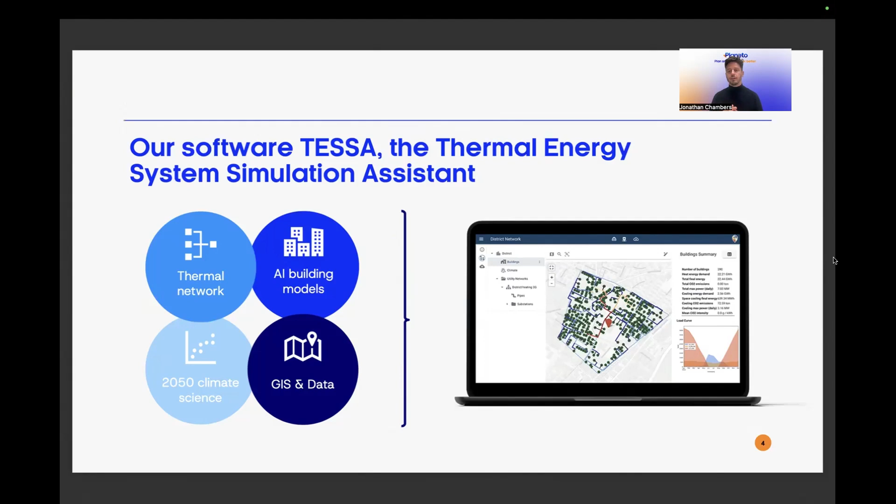All of this powered by large geospatial and building data sets, climate data sets, everything needed for powering all of these algorithms. These are the four things that we integrated into our online software platform so that engineers at energy utilities and engineering consultants can deliver these projects faster, better, with higher proportions of renewable energy to decarbonize the built environment and to enhance energy security.

We deliver this in our TESSA platform with three main topics, the first of which is allowing flexible scenario analysis. So that means being able to do many scenarios, make them very quickly, make them very easily, adapt them with, for example, different energy sources, different base assumptions to really support better decision making.

We can then really help respond to the customer needs, so really the end users and municipalities, which are the ultimate client of utilities and consultants, by, for example, adapting to local conditions, integrating local renewable energy sources or local excess heat or waste heat from industry. And for our clients, our consultants and so on, to be able to help you win those tenders, help you win those projects, make sure they're actually successful and that they carry through from the first feasibility stages really all the way through design and implementation.

And of course, in this process, we maximize productivity. We turn what can take weeks and months of data collection and design and compress that into a few hours and just a few clicks. We can automate complicated and fiddly topics like dimensioning pipe sizes and optimizing their layout. And we allow you to use the same tools from really the blank slate of the pre-feasibility stage all the way through design engineering phases, with a single tool that carries all of the data and allows all of the detailed work that needs to be done. And finally, we have some really nice collaboration tools built in because we know these are complex, multi-stakeholder projects.

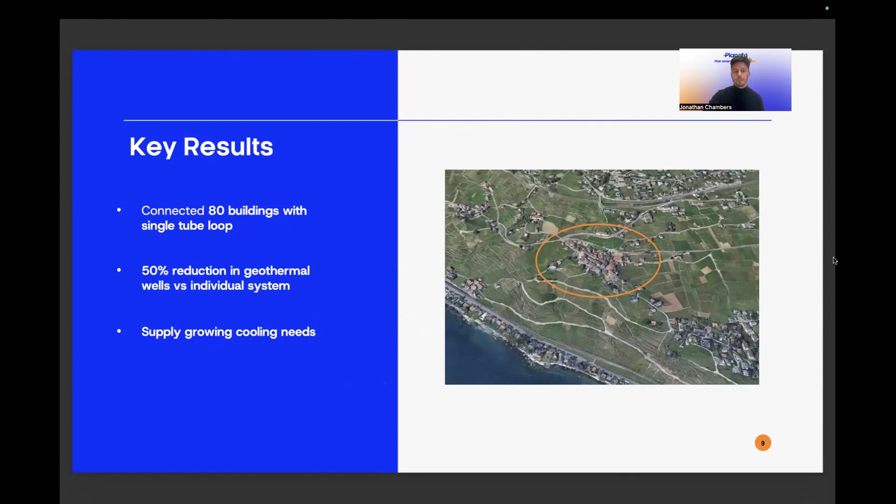The second case study I want to present was in Haute-Sorne. So this was more of a high-level strategic energy concept. Haute-Sorne is quite a mixed municipality with some urban and rural areas that were looking to reduce their CO2 emissions. Actually, they were seeking an energy label, the Energy Cities Green Energy Label. This is where we delivered TESSA in collaboration with our friends at GeoImpact to deliver investment costs and energy cost projections for an energy transformation for the communities that would use district heating as designed by our TESSA platform.

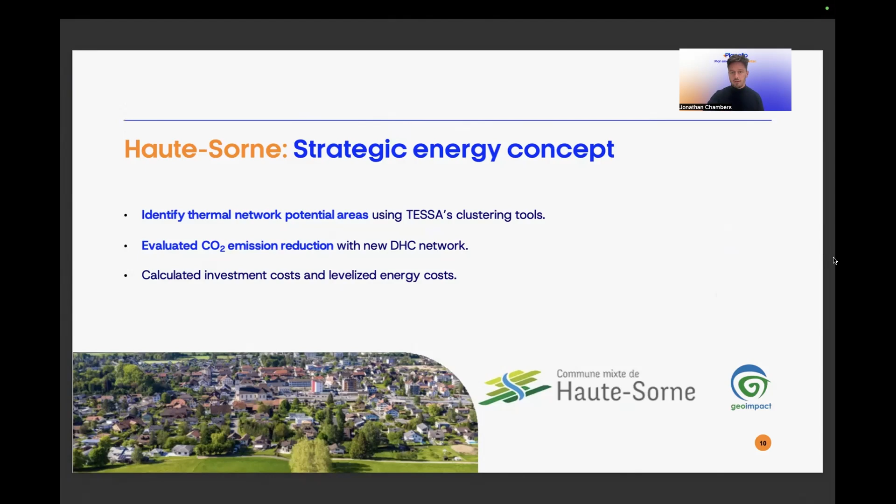So the key results of this: using TESSA, they were able to identify just 5 building clusters that represented 80% of the emissions across the whole municipality. And with just 184 buildings identified, they could design a ground source heat distribution system with a wood pellet peaker plant. So that really used very nicely the local resources they had, which was space for some geothermal base load and quite a lot of managed forested area, which could provide green wood, so renewable energy sources.

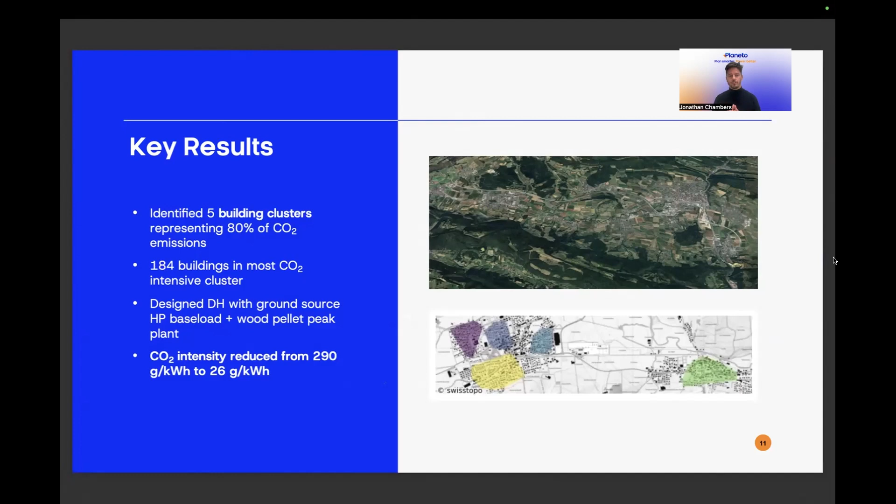And this resulted in them being able to demonstrate a reduction of 10 times the CO2, so going from 290 to 26 grams CO2 per kilowatt hour, thanks to these designs, and do so very quickly and very accessibly.

The last case study I wanted to mention was something where we worked with our very good friends at Sympheny for the energy utility of Schaffhausen. Sympheny do multi-energy optimizations, so that means across electricity, heat, and other energy vectors, and are able to optimize for an area what could be the best resources. And in synergy with TESSA, we were able to demonstrate an automated optimization pipeline for the decarbonization of the urban energy supply and its distribution.

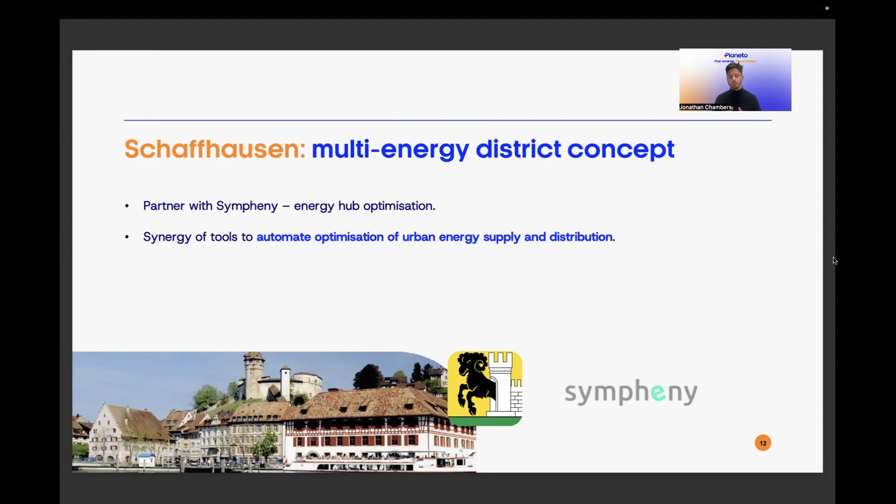So the key result was really automating this whole pipeline, so optimizing which kind of energy resources should be used, and then, thanks to TESSA, optimizing the creation of the thermal distribution network and the simulation of this network, which is of course relatively complicated, having multiple heat sources: solar thermal, wood, various heat pump sources. So that's a multi-source meshed network that we were able to simulate in TESSA and have a fully automated optimization pipeline, with a pilot in one of these areas with about 5 kilometers of pipeline.

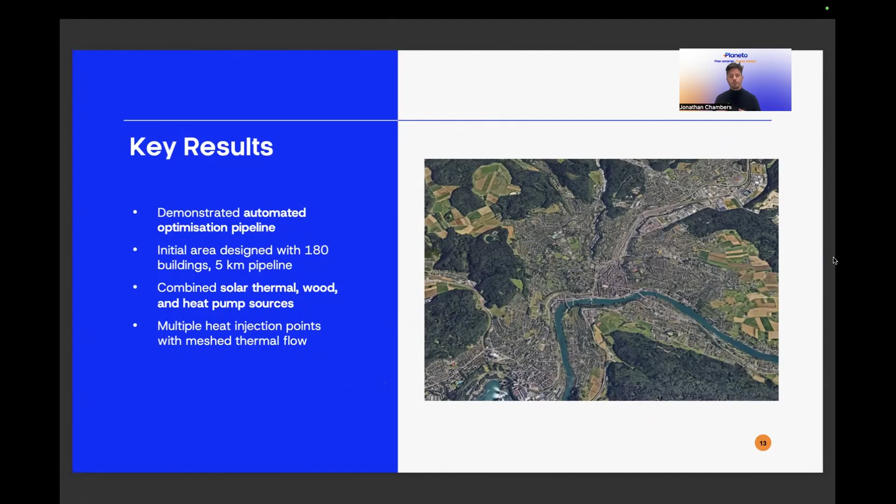What are some of the key features of TESSA that make this possible? Well, we see a few things that are most interesting in the end for our current users and for our current clients. The scale and the speed that we're able to deliver.

So automating a lot of this energy demand modeling, automating with generative AI the design of the distribution network, providing data which is plug and play data for the whole of Switzerland today. We have on our roadmap for the second half of 25 being able to deliver the same kind of data for the rest of Europe.

And of course, being able to have collaborative editing, import of any kinds of data source, export of all the results, very much avoiding this kind of trap of being in a black box, being able to import, export whatever data is needed.

That means that what we can do is go then into the second point, which is really reach the engineering detail that is needed to make these projects go ahead. So rather than just stopping at a general high-level plan, we can really take our automated dimensioning, for example, apply fluid and mass flow solvers, allow the user to do really detailed parameter editing, so get really into the weeds of how to design the real project rather than just do a general feasibility.

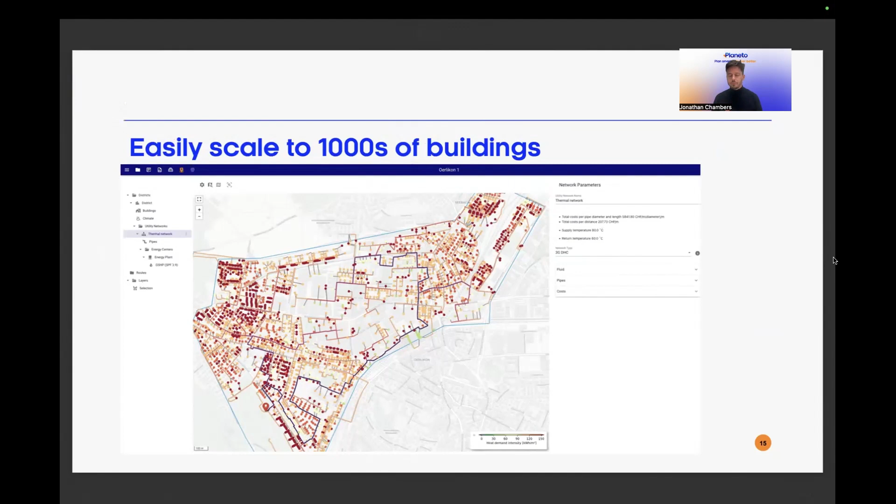To illustrate some of this concretely, when I said scale, of course, some of the case studies you saw were relatively small with a couple of hundred buildings. TESSA has absolutely no problem dealing with much, much larger scale. Here we have an illustration in Switzerland with about 2,500 buildings. So we can really, with TESSA, go up to whatever scale is needed and keep all of these fast automation features. We can have really detailed dimensioning, detailed editing of key parameters.

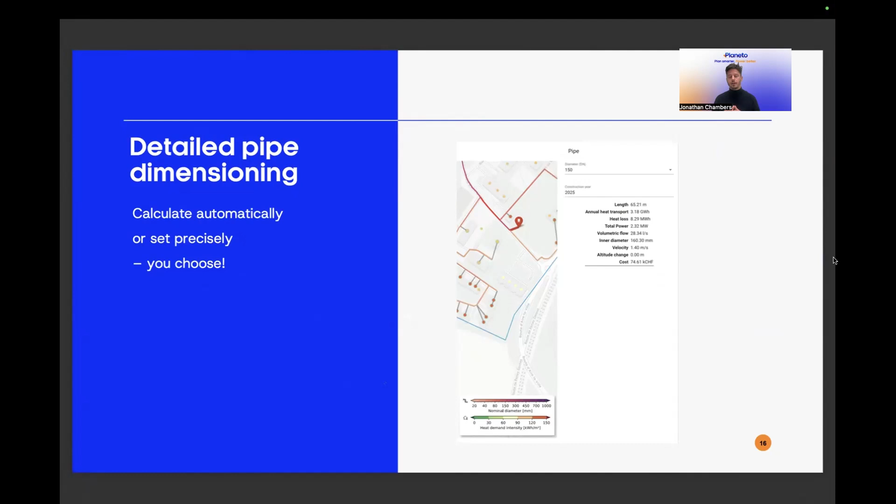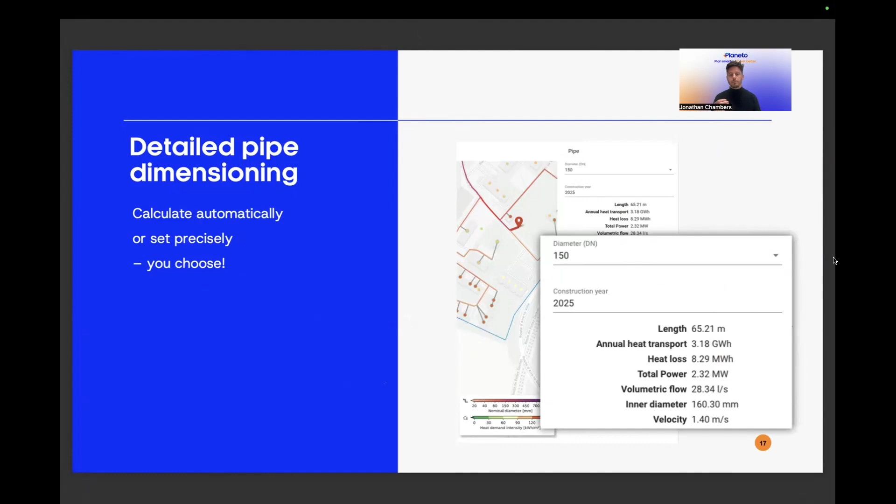So for example, detailed editing of pipes. We can automate the calculation of the optimal pipe dimension, but they can also be set precisely and then give you full detailed data output, like here, for example, giving power and the volumetric flow rate. So really getting into those key engineering parameters which are needed to validate designs going towards construction.

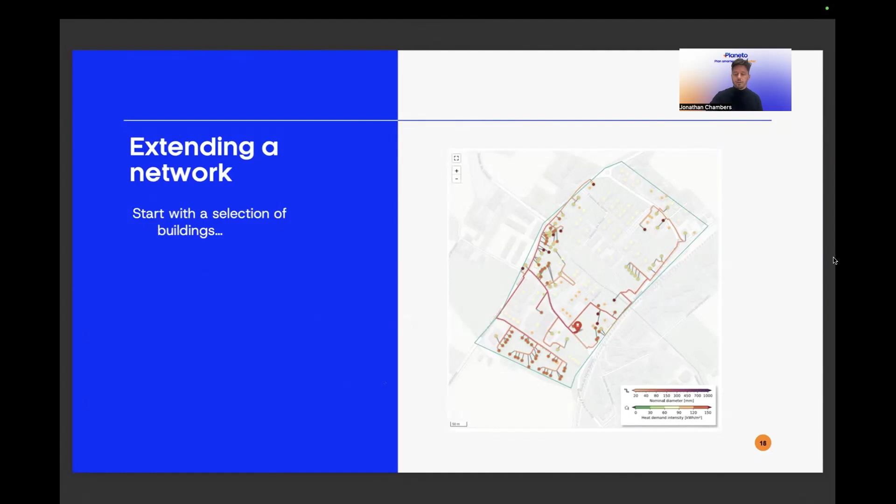Following projects and following how they grow, that's really a very important use case, very important in the real implementation of such projects. Here you can see an example starting with just a selection of buildings, connecting up the least efficient buildings in this particular area as a first stage, and then moving into developing a second stage, extending to the rest of the buildings in the network, in the village. This is really what allows to plan over a long term how your projects are going to grow.

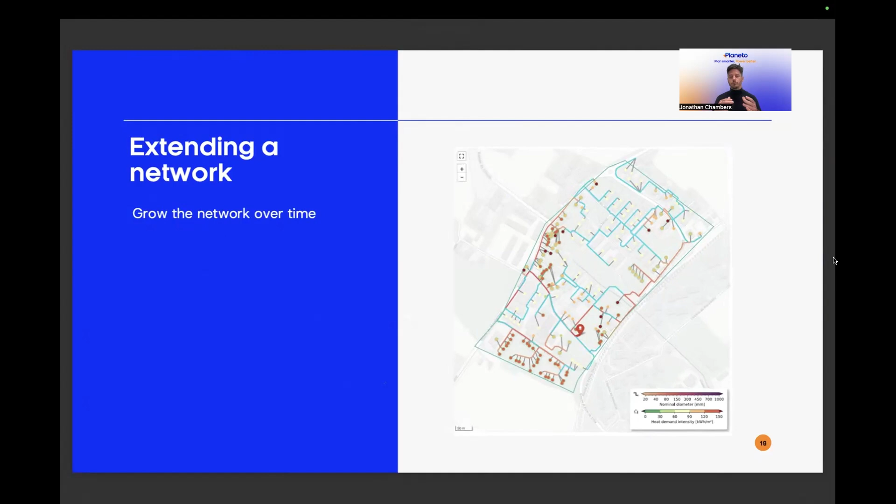And actually, we support many different kinds of workflow. So you can go from an existing network, extending it to more places, or you can have a long-term plan of where you want to go with your total network, and then see which sections of it you should build first. We are very, very flexible in the kind of workflows you build around this.

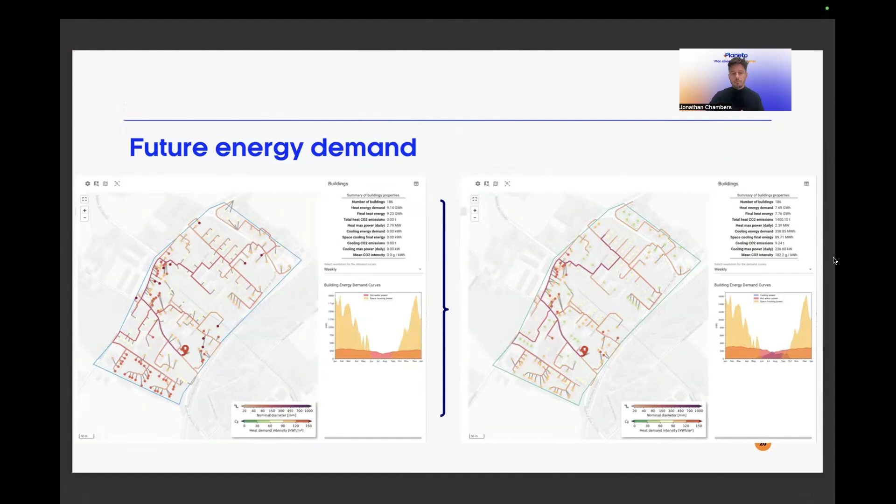As I mentioned also, future energy demand. This is really important for understanding and making sure these projects are really successful. In this case, we're able with TESSA to apply a future energy demand prediction to this same village actually. It's a bit small, but when you zoom in, you can see some really interesting things that start to happen.

The least efficient buildings that maybe you connected first to provide with district heating to reduce carbon, actually in the future will become the most efficient buildings because they will be renovated in priority. This, of course, has a really important impact on the dimensioning of the network and, of course, on the business model of the amount of energy that's supplied. And you can see here in the bottom this little blue curve that starts to pop up. In a couple of decades, you start to see cooling demand become much more significant than it is today.

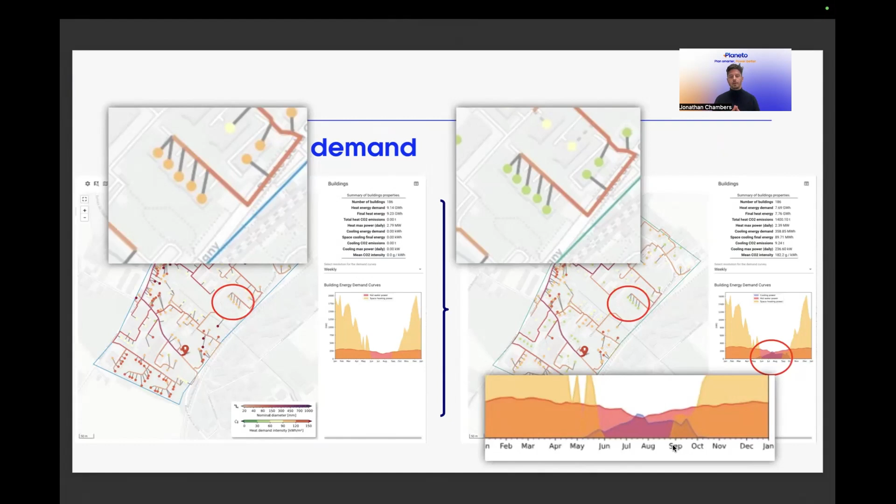And finally, of course, we can't forget the business model. With TESSA, you can very easily do investment calculations, operational cost calculations, understand what impact that's going to have on projected energy prices, build a cash flow model using your predicted sales prices to then get, of course, the classic KPIs, your heat sale revenues, your net present values, payback periods, all of the key financial indicators that flow from the design of the system.

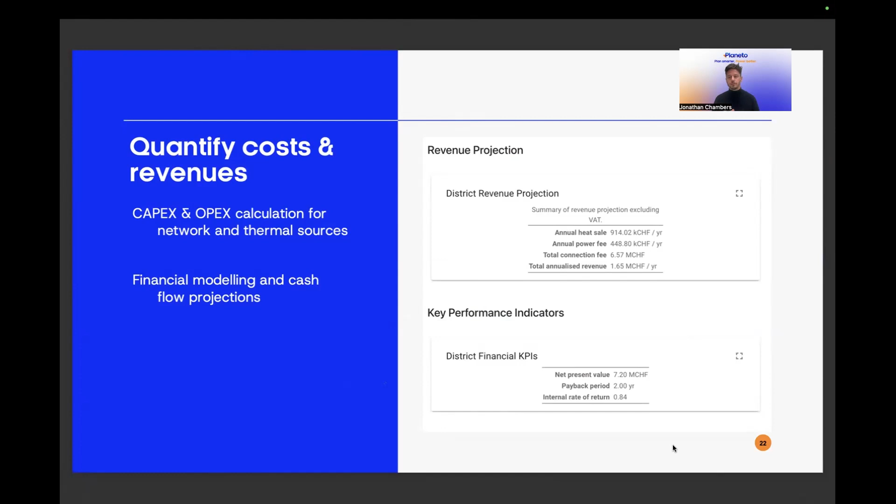In this case, for example, we actually have quite an attractive payback period of 2 years. So these are the kind of very strong arguments that can be made towards decision makers and energy utilities and so on.

So now I'd like to pass over to a brief demo, just to give you a flavor of what we can do. We have, of course, many capabilities, as I'm sure you've seen. So we also invite you, if any of this entices you, to please contact us, and we can give you a much more in-depth demo based on your specific needs. So now I'm just going to give you a brief overview.

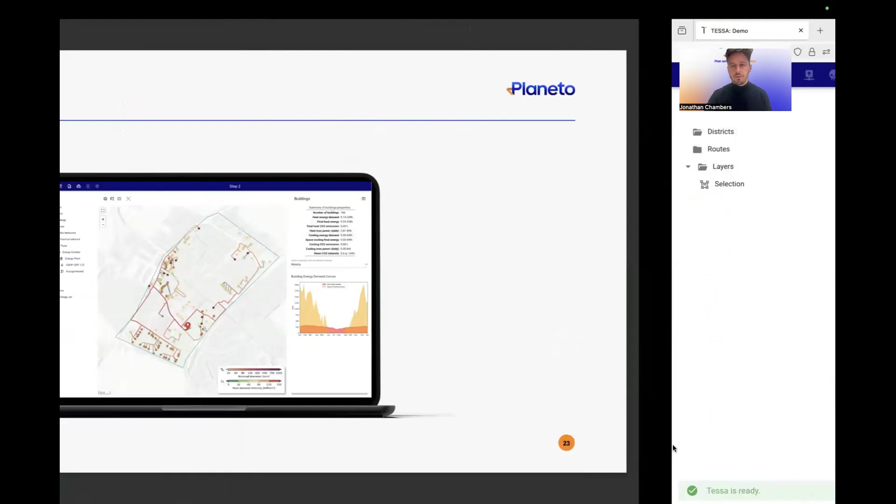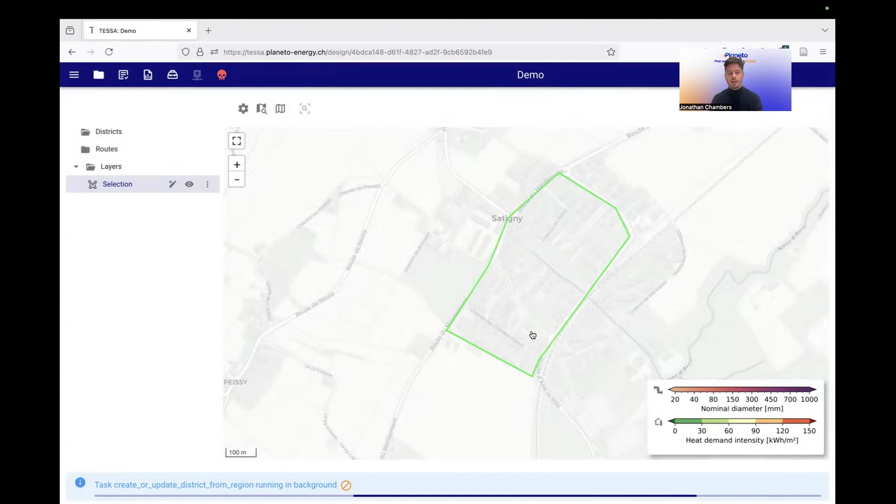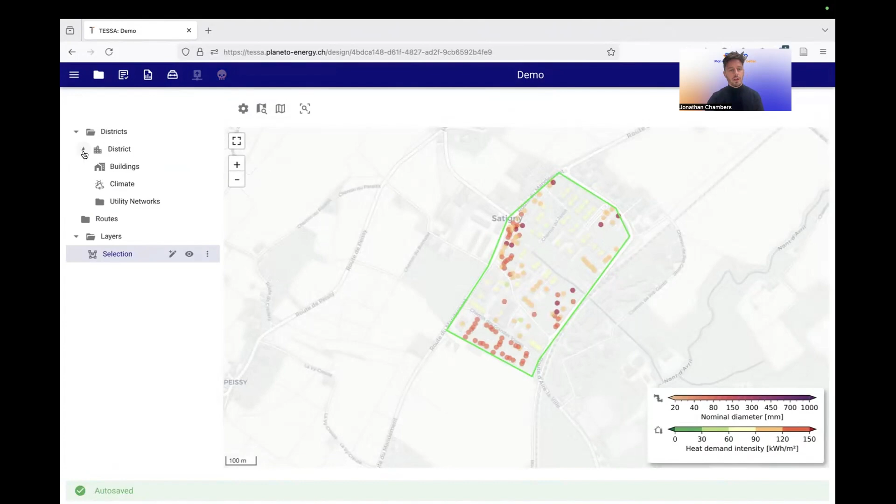Using actually the same village you've seen in some of these examples, Satigny near Geneva, very nice place up in the vineyards. I've already drawn a selection for it, so I can very quickly, with my toolbox, create a district based on the selection. What's actually happening here is we have a live simulation of the energy demands based on building characteristics. So now we have all of the buildings color coded based on the heat demand intensity. We have a full simulation, including, for example, heat demand load curves based on climate and so on.

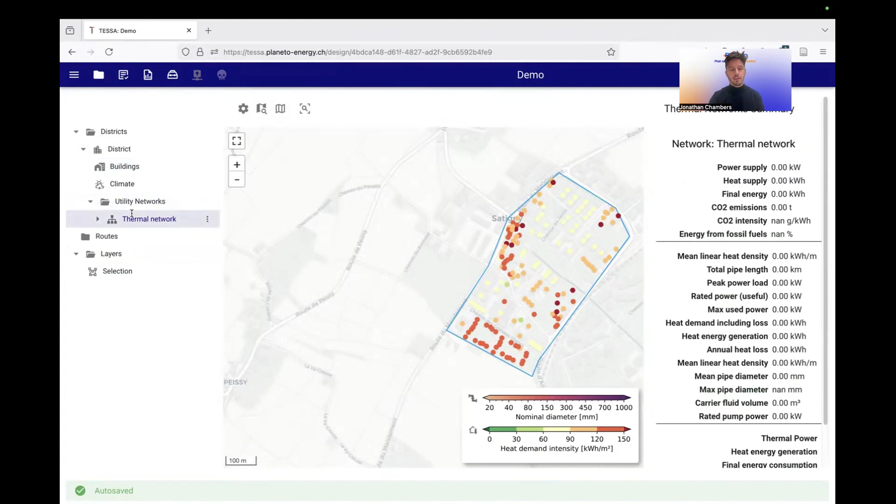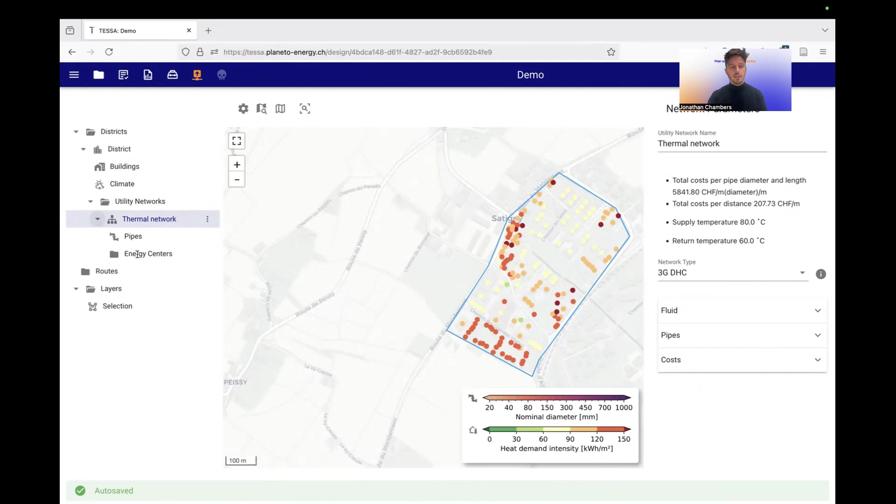I can configure equally quickly a utility network, a thermal network with many kinds of parameters. In this case, we can leave all of the defaults, which is a classic third generation system with an 80-degree supply temperature. Add an energy center, move it to where I think could be a good spot for it. Configure its characteristics, like adding what kind of heat sources. Configure the heat source. Let's just make a ground source heat pump for the sake of the example. Now I have a full configuration of the first, let's say, scenario of how we would build this network.

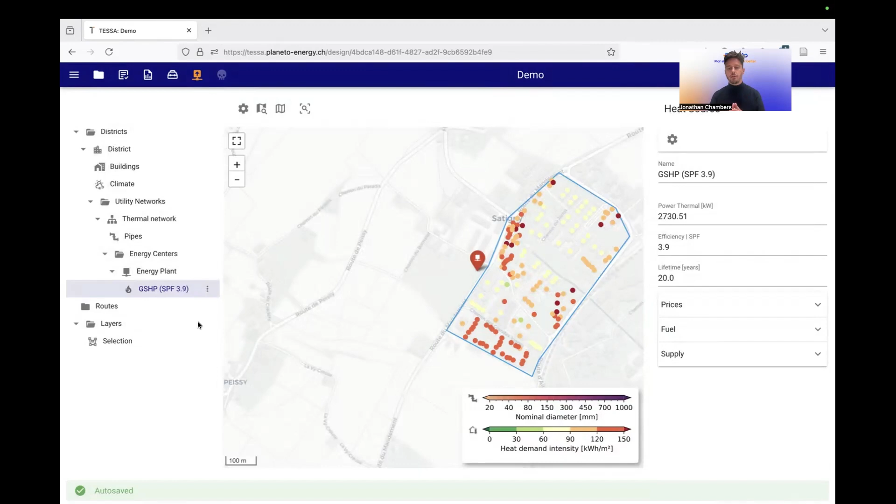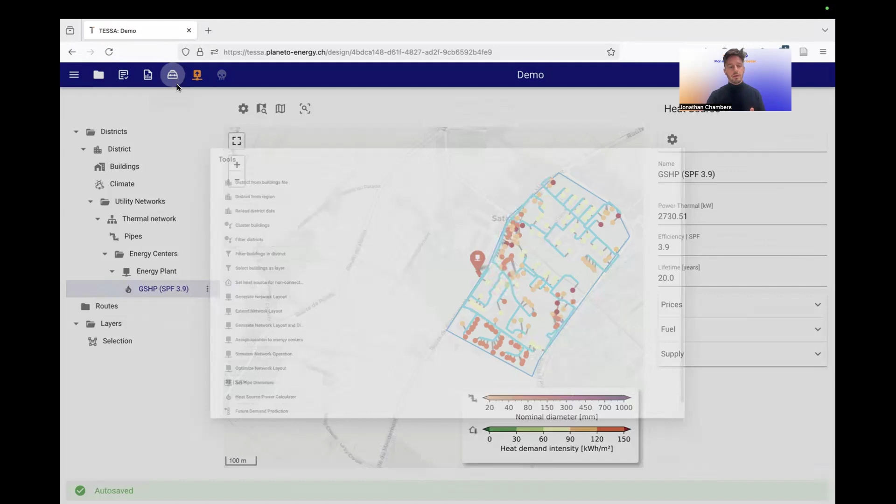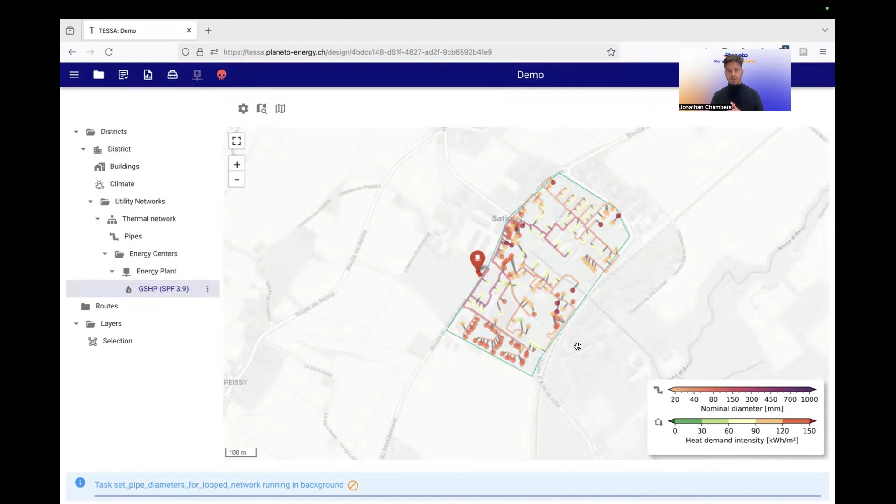I can then create a layout for it. And we can see really in a few seconds, we've gone from a completely blank slate to an energy demand prediction, a thermal network configuration, and a layout of where all the pipes are going to go. I can also then start to dimension my pipes using our automated pipe dimensioning tool. All of these things, in this case, I'm just letting TESSA set automatically, but everything can then be edited manually. Layouts, dimensions, all of these things can be set by hand or modified, or by applying other optimization algorithms. And finally, I'm just going to simulate the operation.

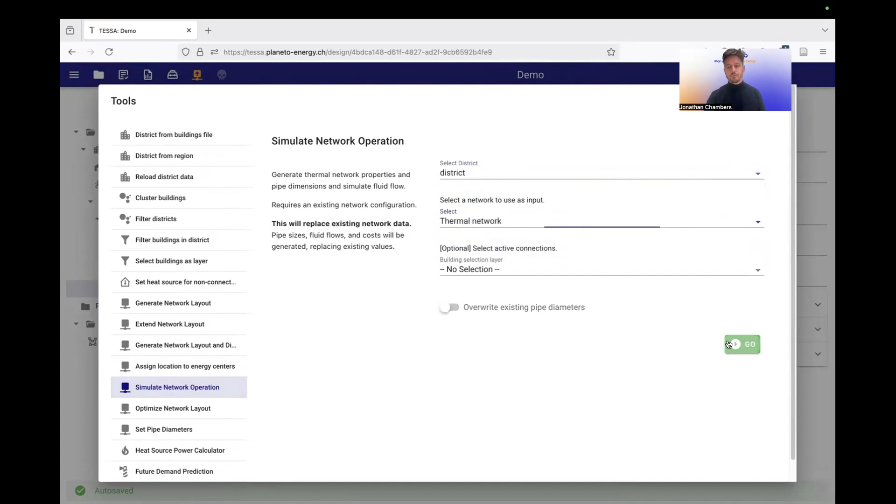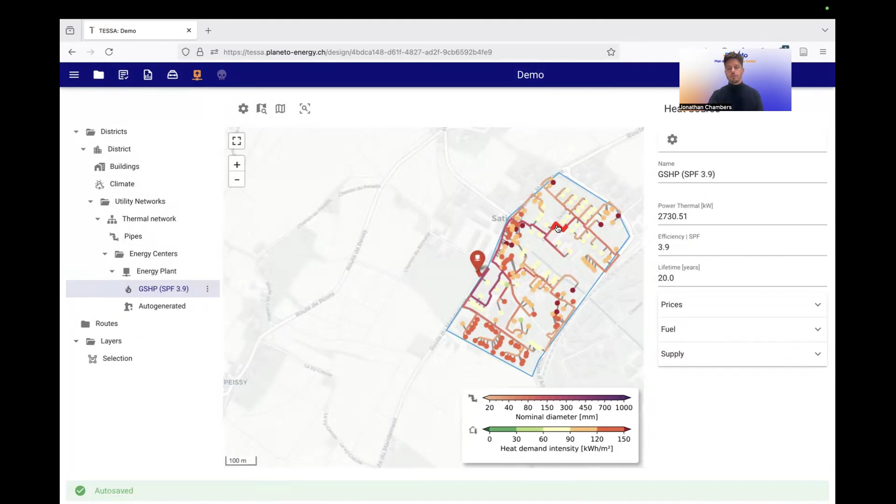And this now allows, for example, if I select a pipe, to see the full detail of the output of our tool for this given pipe, where I have the nominal diameter, I know its length, I know how much heat it's going to transport, I know the peak fluid velocity, and I have a cost estimate, in this case based on the assumptions.

So what we've seen there is really in just a couple of minutes going from a blank slate to a very complete first draft with engineering parameters, physical dimensioning, cost estimates that can then be used to go to the next stage of the project. And of course, in the next stage of the project, we can come back to this case, do more editing, get into much more detail, and respond to comments or changes to the brief in order to really find the project that's going to fit best for this local area and meet the local requirements.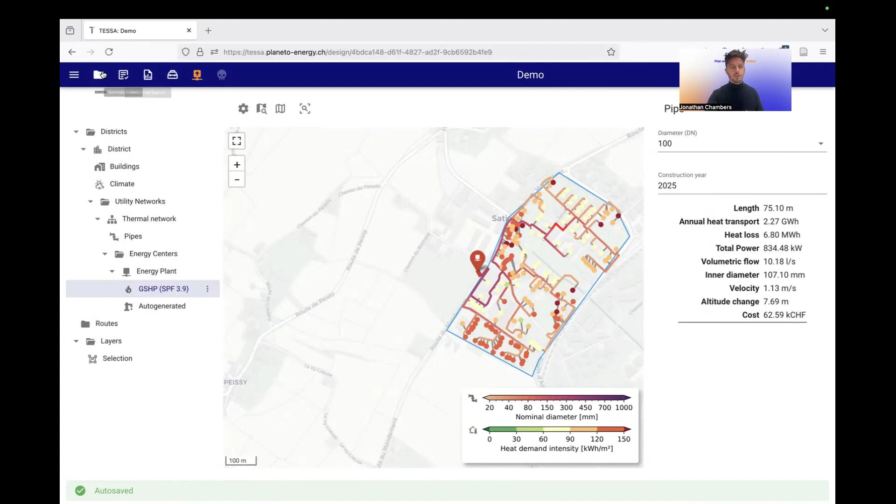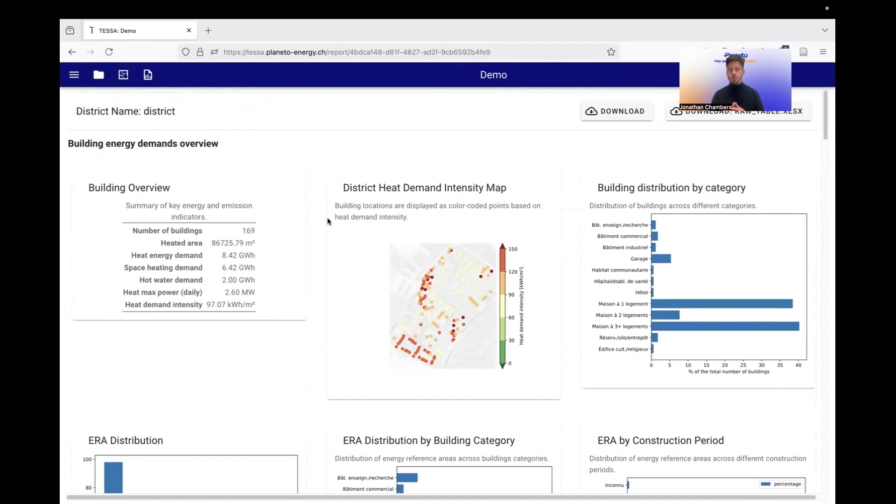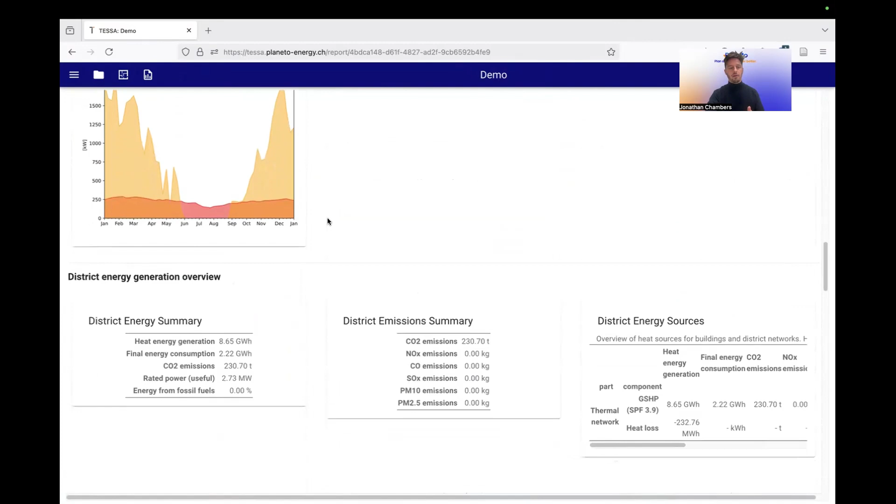Just to give you an idea, we also have a very complete summary report that produces a huge amount of data that can then be used for your reports, exactly to provide a strong argument for design. We have very large amounts of data about buildings, about energy carriers, about the characteristics of the district network, about costs, and all the other kinds of KPIs.